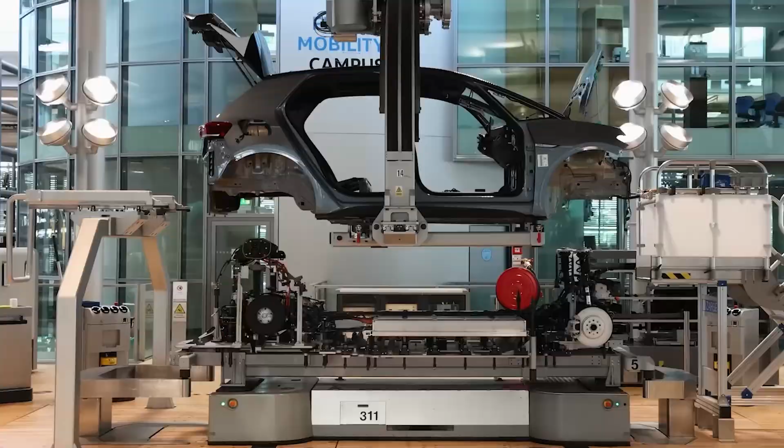You think you know Tesla. You see the brand that made electric cars cool, the company that sparked a revolution, forcing every legacy automaker into a frantic, multi-trillion-dollar pivot. But if you're just looking at the Model Y or the Cybertruck or that rumored $25,000 car, you are missing the real story. You're seeing the shell, but not the ghost.

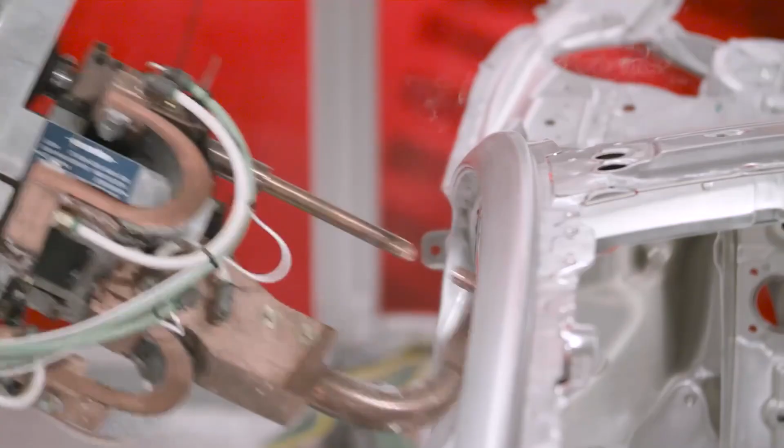Because the car is just the first vessel. Tesla's latest tech isn't one new gadget. It's a deeply integrated five-part ecosystem, a web of innovation. And when these parts combine, the goal isn't just to build a better car. The goal is to fundamentally rewire manufacturing, energy, transportation, and even labor itself.

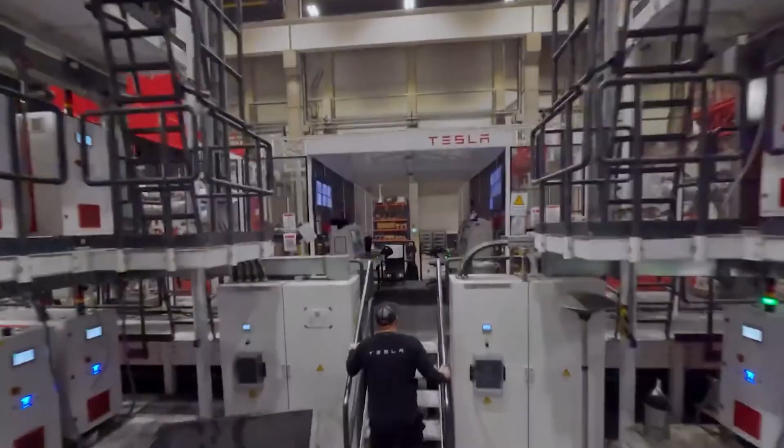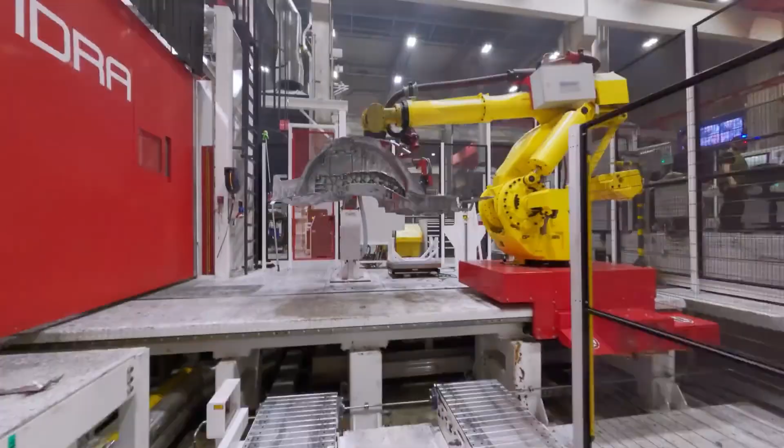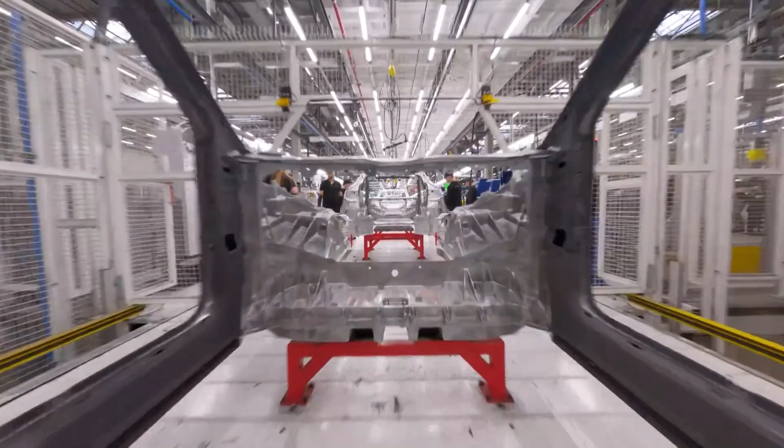This playbook has 5 moves, each one a potential checkmate. First, the unboxed manufacturing process, a total teardown of the 100-year-old assembly line. Second, the 48-volt architecture, a foundational rewrite of the car's nervous system. Third, the 4680 battery cell, the key to unlocking true mass-market range and cost. Fourth, end-to-end AI, the Chat-GPT moment for self-driving that finally unlocks the robotaxi. And fifth, Optimus, the humanoid robot that takes all that AI and puts it on 2 legs.

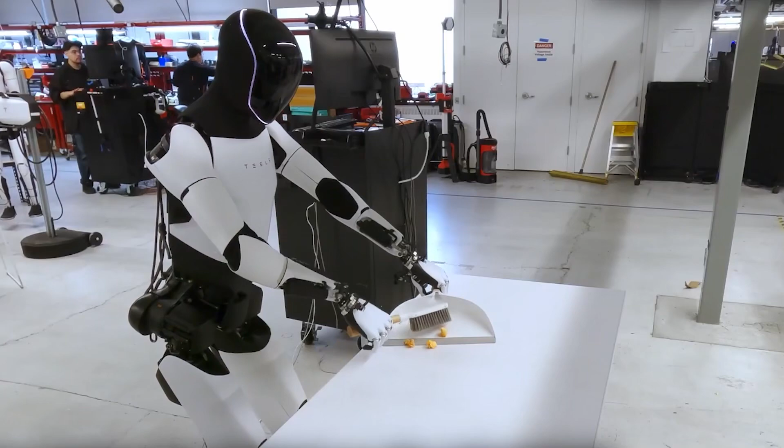Any one of these could change the game, but all 5 together? It's an integrated stack, a fortress that might just give Tesla an insurmountable lead for the next decade.

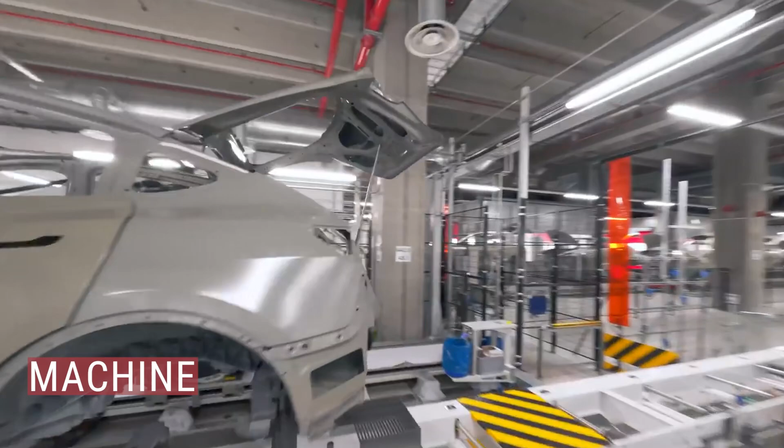This is Dravexa. You need to understand, the most profound innovation at Tesla today isn't a car. It's the factory. You've heard the phrase, straight from Elon Musk, the machine that builds the machine. That is the real product. And with their next-generation platform, that vision is no longer a soundbite. It's here. It's a concept they call the unboxed manufacturing process.

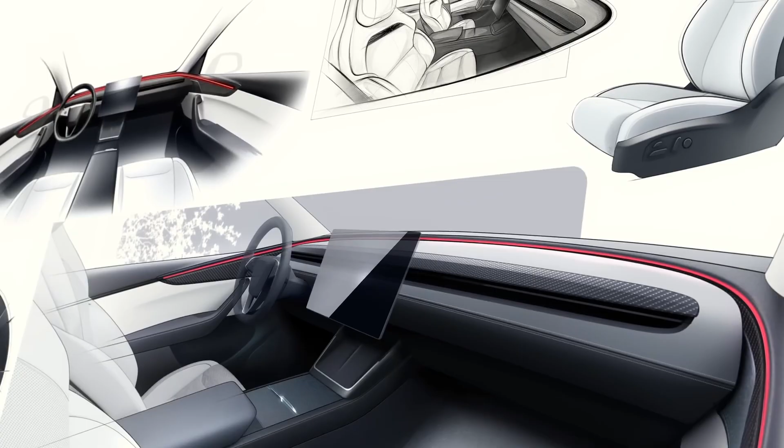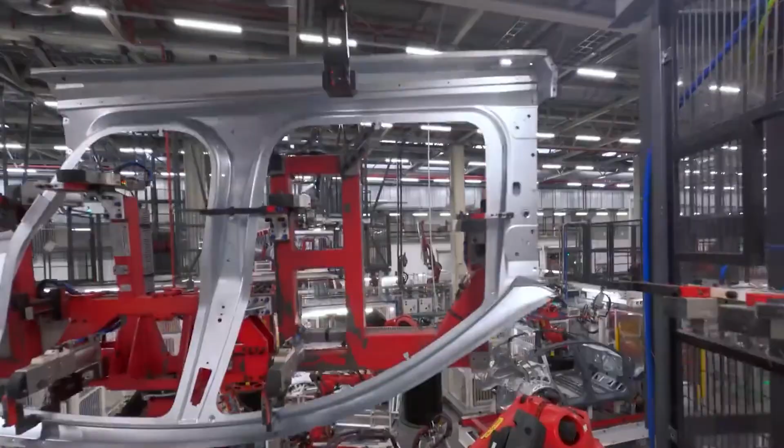For over 100 years, one idea has ruled mass production. Henry Ford's assembly line, you know the picture. A car frame, a body in white, rolling down a single track. Workers and robots swarm it, sequentially adding parts: the suspension, the wiring, the interior, the powertrain, the doors. But that process is fundamentally broken.

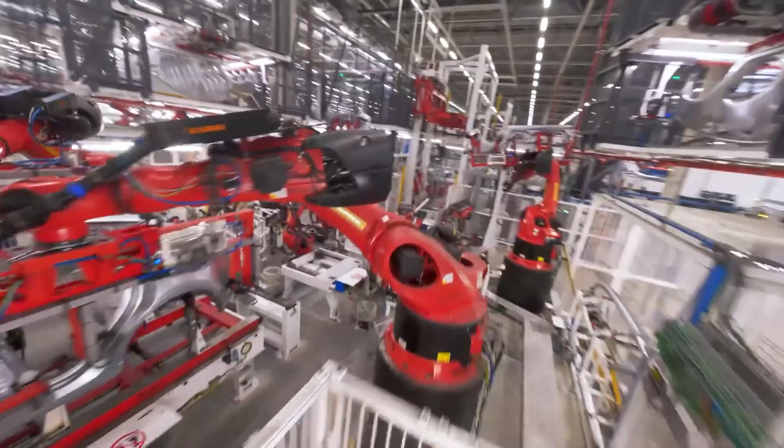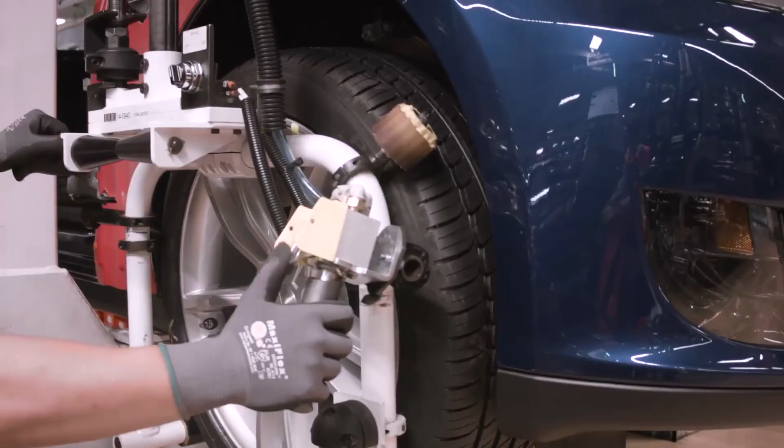Think about it. The entire line can only move as fast as its slowest step, a total bottleneck. Workers and robots are forced into this cramped, complex dance, trying to get inside and under the car. And the line itself, it's inflexible. It's built to do one thing. Retooling it for a new model, it's a nightmare. It's slow.

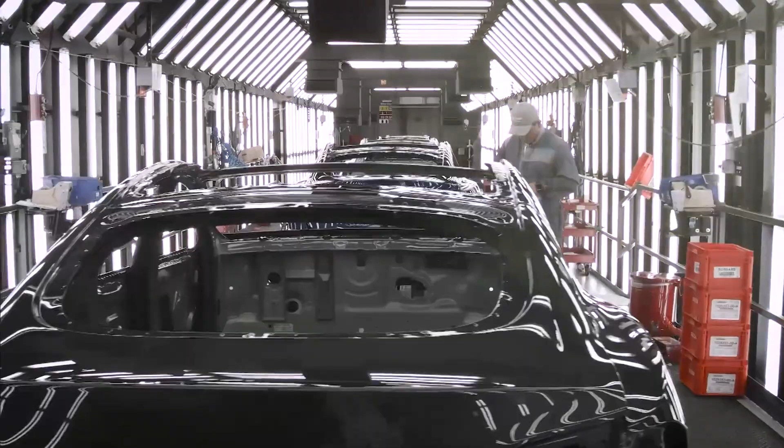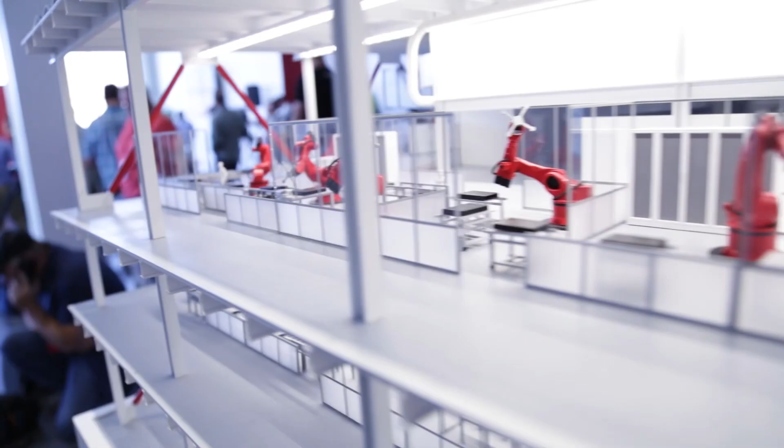It's expensive. So Tesla's unboxed method throws that entire 100-year-old concept in the trash. Instead of one long, slow line, the factory is organized into parallel processed chunks. Think of it like building a Lego car. You'd never build the frame first and then try to stuff the little driver through the tiny window. It's absurd. You'd build the floor, the front block, the rear block, the cabin. And then, at the very end, you just click them all together.

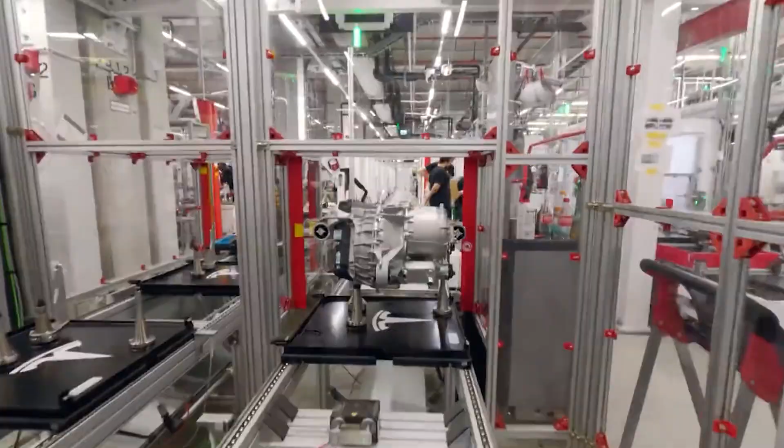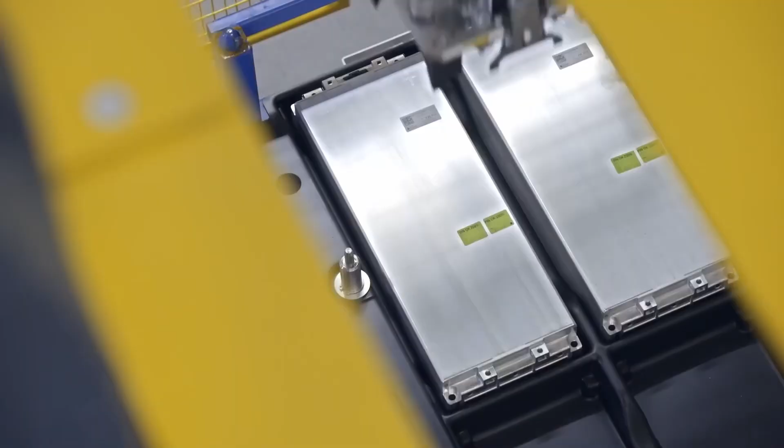This is exactly what the unboxed process does. Imagine this: over in one corner of the factory, that massive front Gigacasting is getting its motor, its suspension, its steering. At the exact same time, in another corner, the rear Gigacasting is getting its motor. And simultaneously, the central floor pan, which is the 4680 structural battery pack, is being prepped.

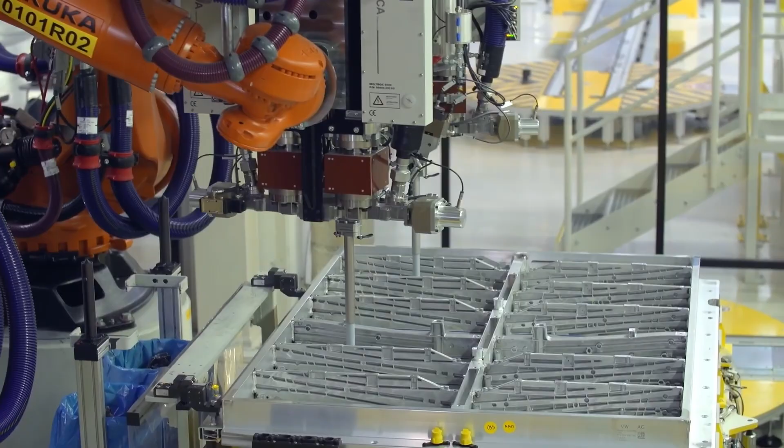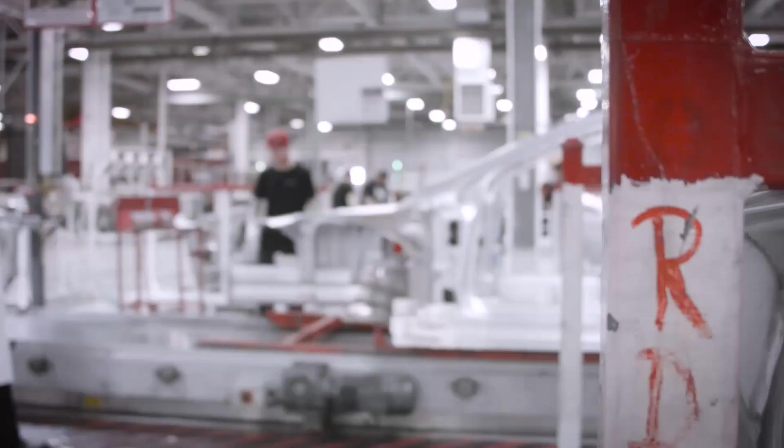The real magic? Open access. Workers and robots have a full 360-degree attack. You want to install a dashboard? It's simple. There's no roof, there are no doors in the way. It is massively faster, it's more ergonomic.

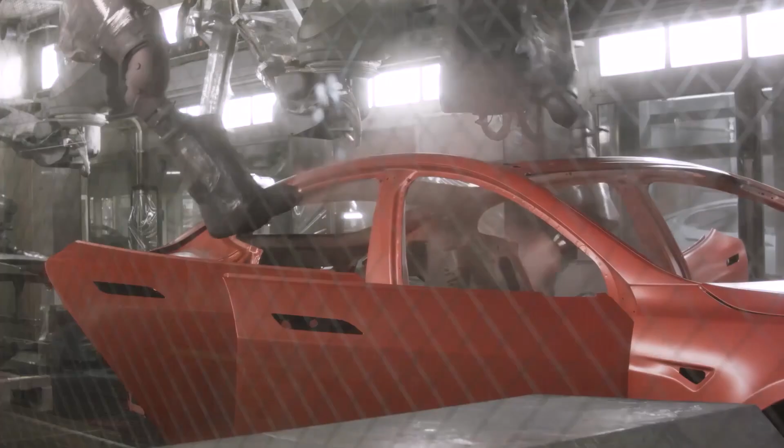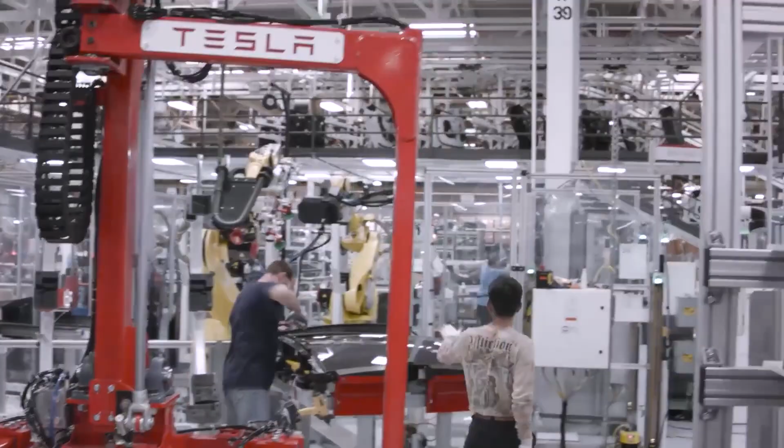Then, and only then, do these huge pre-assembled, pre-tested modules meet the front, the rear, the painted side sections. They're all joined to that structural pack in one final step. The results? Tesla claims a staggering 40% reduction in factory footprint, a 25 to 30% increase in production speed, all while slashing the cost to build the factory in the first place. This isn't just an improvement, it's a new paradigm.

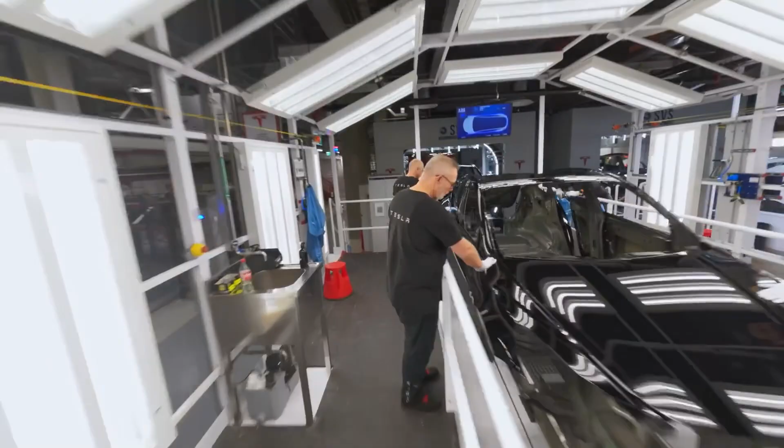This is the only way Tesla can realistically build that $25,000 car at high volume and, most importantly, at high margin. But here's the secret: that unboxed method, that whole Lego block strategy, is only possible because of another Tesla innovation, Gigacasting.

You have to understand, traditionally, a car's underbody is a complex puzzle. We're talking 70, 100, even more different stamped metal pieces. All of them have to be painstakingly welded together by a massive body shop of hundreds and hundreds of robots.

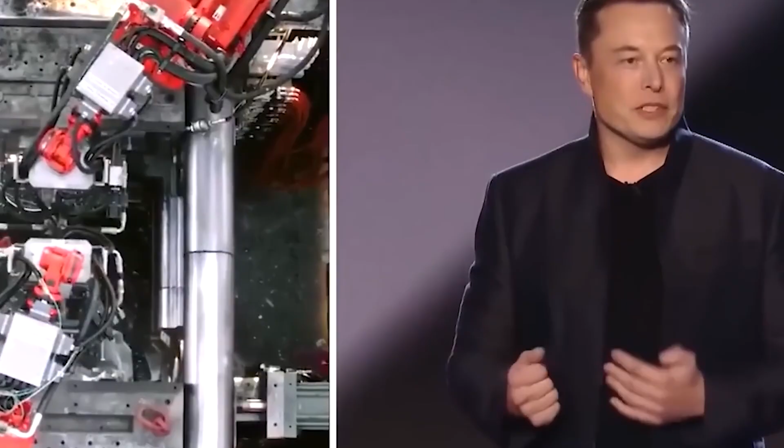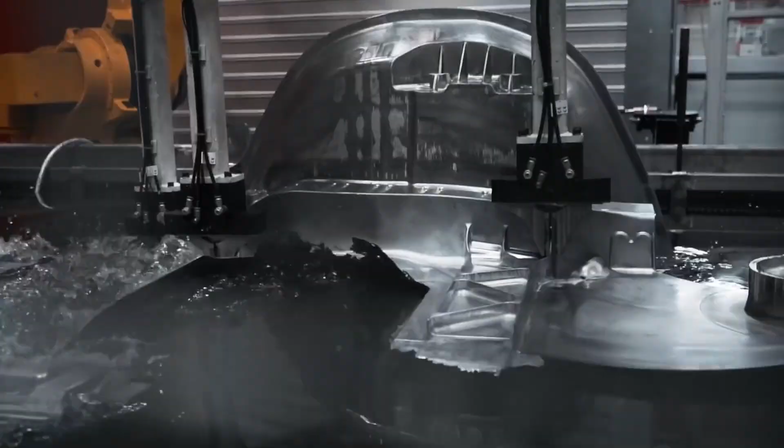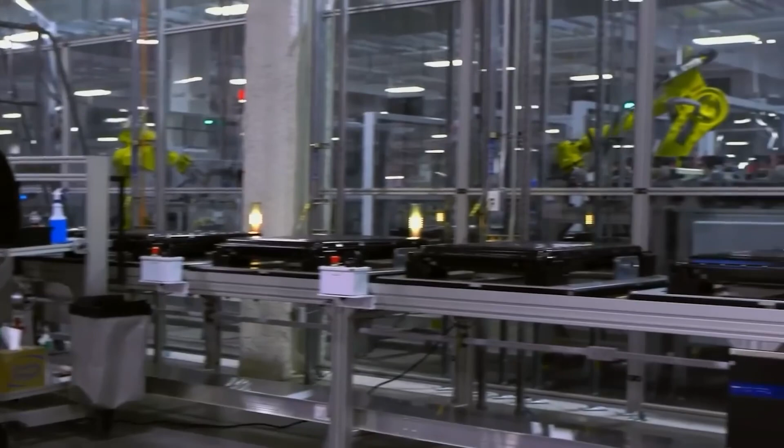Tesla's Gigapress, a machine the size of a small building, throws all that out. It casts the entire front or rear underbody as a single piece of aluminum. Just that one innovation eliminates over 300 robots. It erases 600+ welds. It frees up a massive amount of factory space. The resulting part is stronger, lighter, and critically, unbelievably faster and cheaper to make.

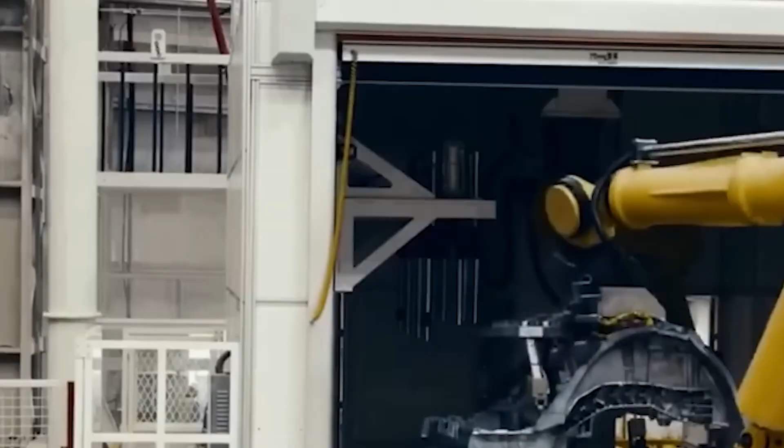That single gigapart, that is the Lego block that the unboxed method is built on. And this is the part that should make you hit that like button.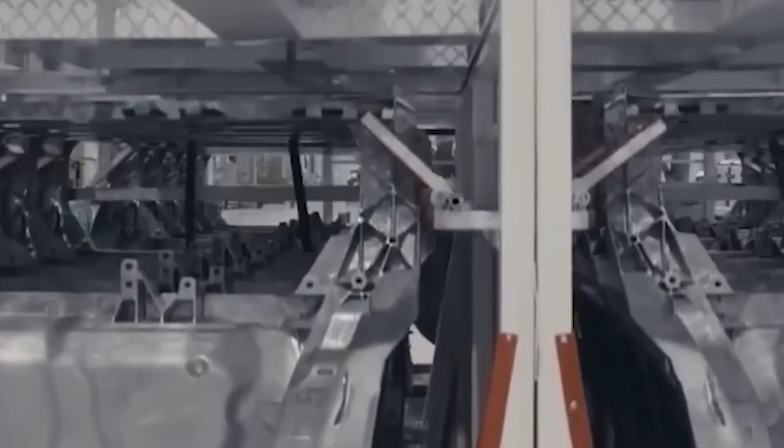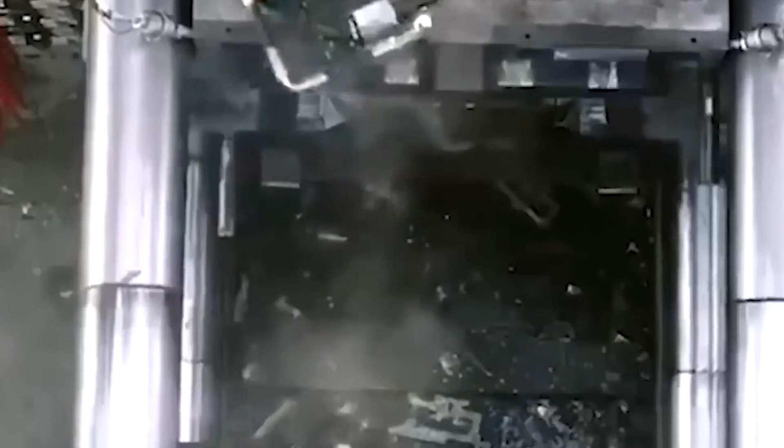While competitors are just now scrambling to order their first gigapresses, they're already years behind, because Tesla isn't just ahead in the machine, it has a multi-year lead in the metallurgy, the secret sauce, that special aluminum alloy that is strong, not brittle, and perfectly castable at high speed. That is a deep, costly moat. And for legacy automakers with their billion-dollar investments in those old-world body shops, crossing it might be impossible.

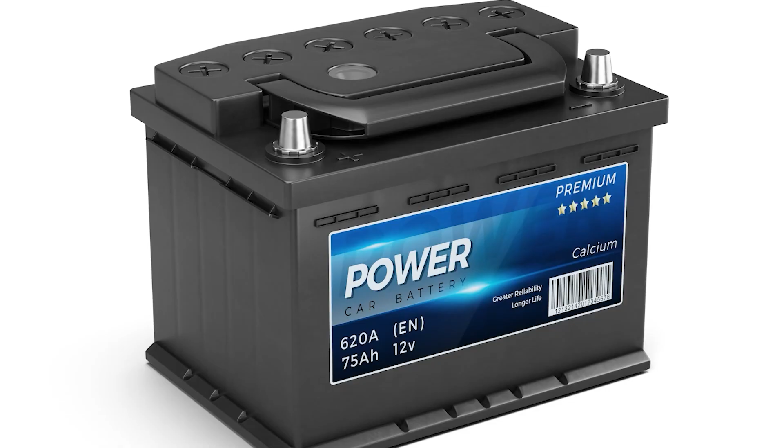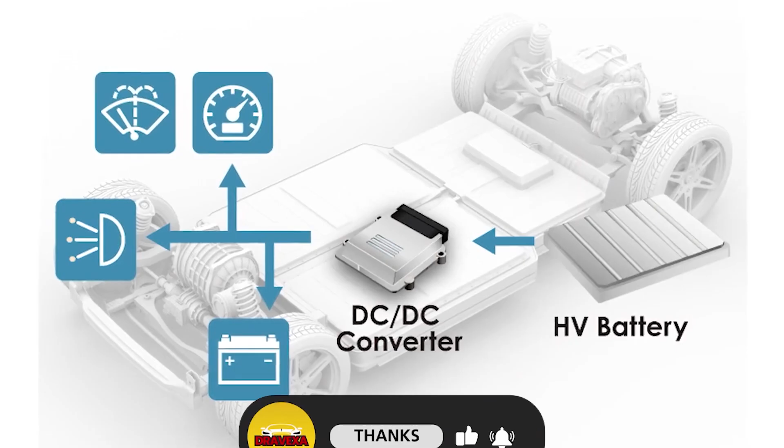So, you have the unboxed skeleton. Now, you need a nervous system. For over 60 years, the entire auto industry has been locked into a dying standard, a 12-volt system. This standard was designed for simple machines, a car with lights, a radio, and maybe power windows. But today, your car is a supercomputer on wheels, and that 12-volt system has become a critical bottleneck.

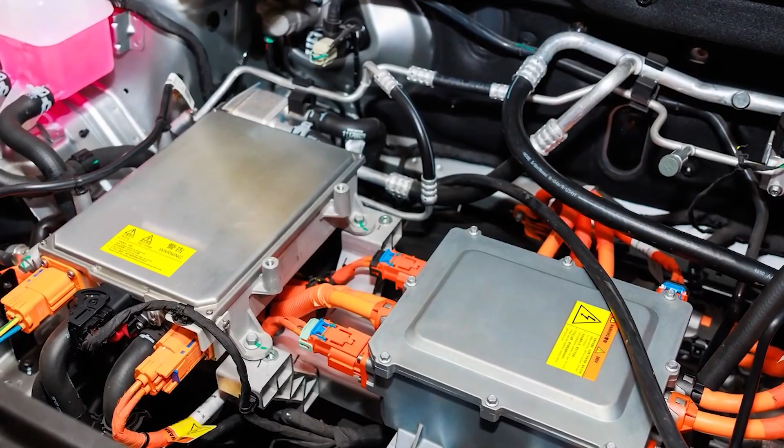The problem is just basic physics. You've heard the equation, power equals voltage times current. If you want more power, say for faster moving seats, a more powerful audio system, or the advanced steer-by-wire you see in the Cybertruck, you have to raise either the voltage or the current. And since the industry has been stuck at 12 volts, their only option was to drastically increase the current. The result? Thick, heavy, expensive copper wires to manage the heat and the load.

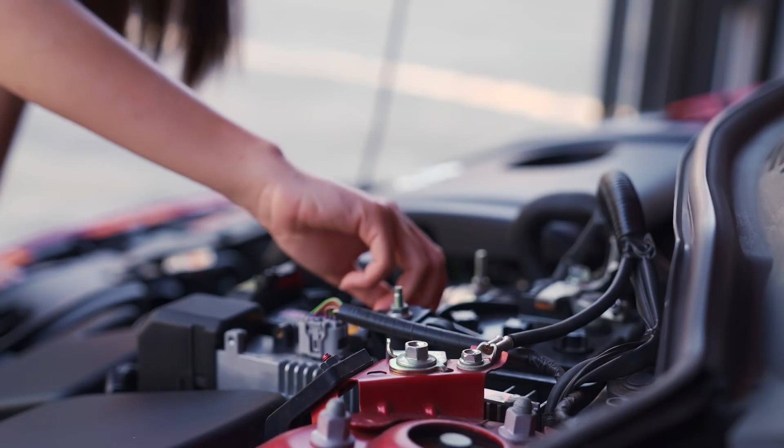We're talking about a wiring harness in a modern luxury car that can weigh over 50 kilograms. That's over 110 pounds. It's miles of copper. It's one of the most complex, costly, and manually installed parts in the entire vehicle. Worse, you hit a hard limit. You simply cannot run the high-power systems of the future on a 12-volt rail. Not efficiently, not safely. So, what does Tesla do?

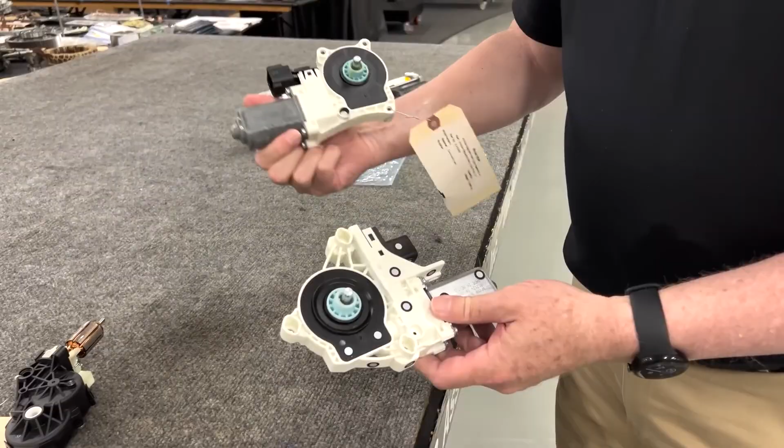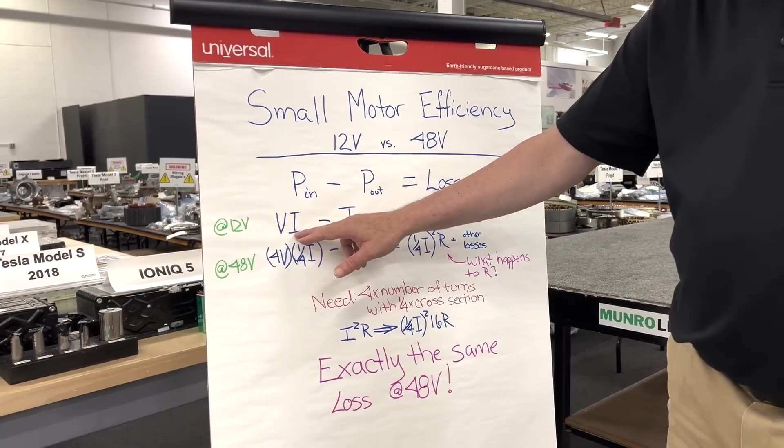They change the equation by moving to a 48-volt system, first in the Cybertruck and now standard on their next-gen platform. They flip the table. Think about it. To get the exact same amount of power, if you multiply the voltage by 4, you can divide the current by 4. That is a profound change.

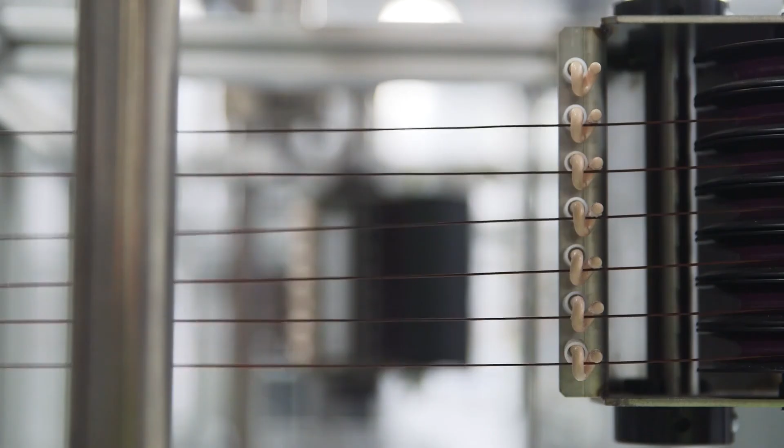A 4 times reduction in current means you can use wires that are dramatically thinner, dramatically lighter, and dramatically cheaper. And the power you lose as heat? That drops by a factor of 16. The Cybertruck's wiring harness is a fraction of the size of a normal truck's.

This saves money, this reduces weight, which increases range, and it massively simplifies that unboxed manufacturing process we just talked about. It's the key that unlocks the Ethernet data bus, where a single cable can finally carry both power and data, destroying the one-wire-per-function nightmare of the past.

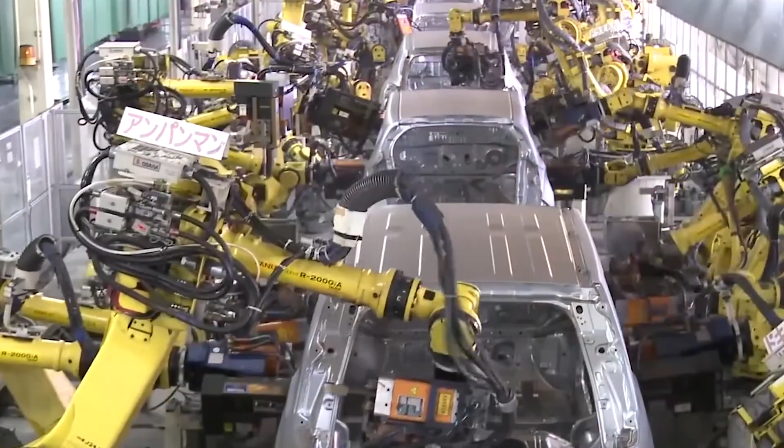This shift to 48 volts, it's not just an internal change, it is a shockwave to the entire global supply chain. For decades, companies like Bosch, Continental, and Denso have perfected the 12-volt world. All those window motors, the pumps, the fans, they are all 12-volt. By moving to 48 volts, Tesla is effectively making its entire parts list obsolete.

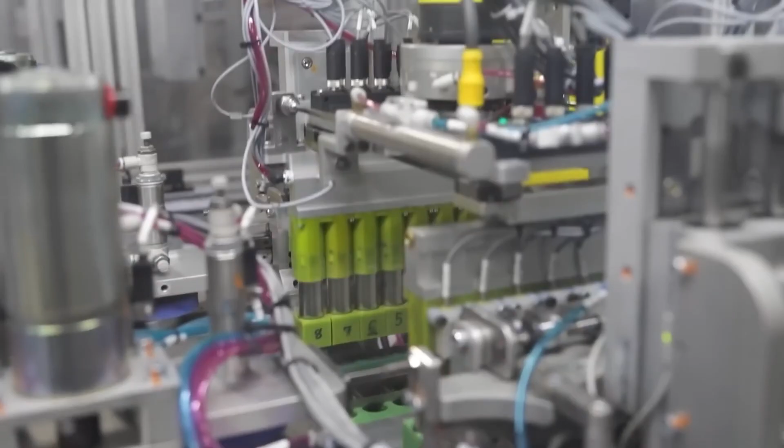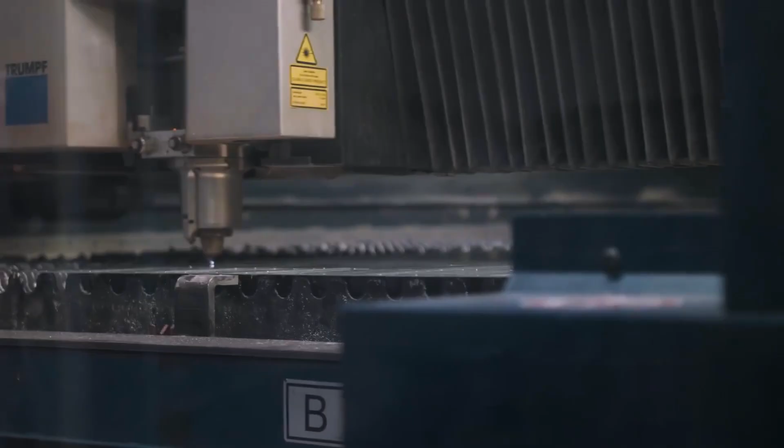Suppliers now have to re-engineer, retool, and revalidate everything. A company like Ford or GM, they can't just switch. They are being held hostage by a supply chain that simply isn't ready. But Tesla? Because they designed so many of their own controllers, their own components, they can force the change. Their vertical integration lets them absorb the complexity. While their competitors are left tethered to a 60-year-old standard, adding yet another layer to Tesla's massive manufacturing and cost advantage.

So, your factory is fast, your car's nervous system is efficient, but you still have a massive problem. Energy. The car still needs a breakthrough to be affordable for everyone. And that breakthrough is the 4680 battery cell.

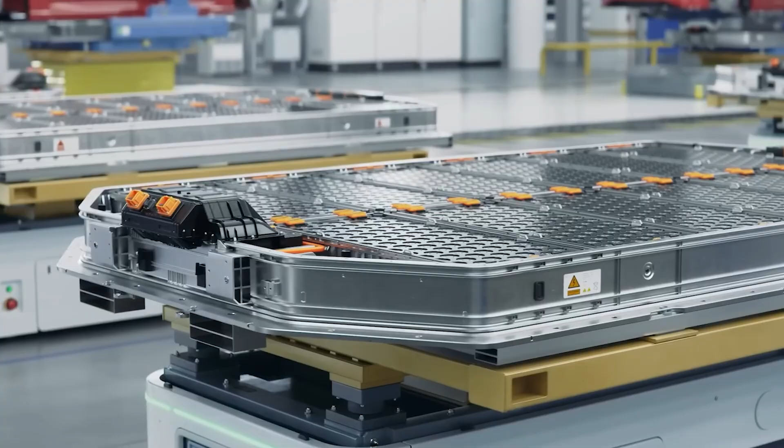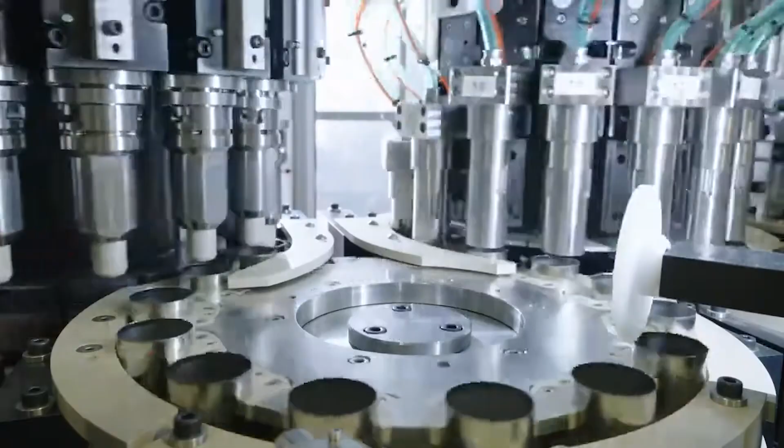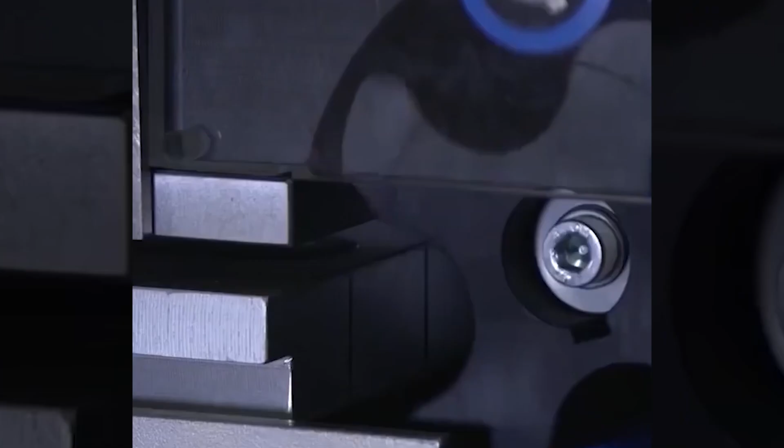The name? It's just the dimensions. 46 millimeters wide, 80 millimeters tall. But its design? That is the revolution. You see, a traditional battery, like the 2170 cells in a Model 3, has two little tiny tabs at the ends. All the energy has to fight its way in and out through these two tiny bottlenecks. This creates a traffic jam. It creates massive heat, especially when you're charging fast or flooring it.

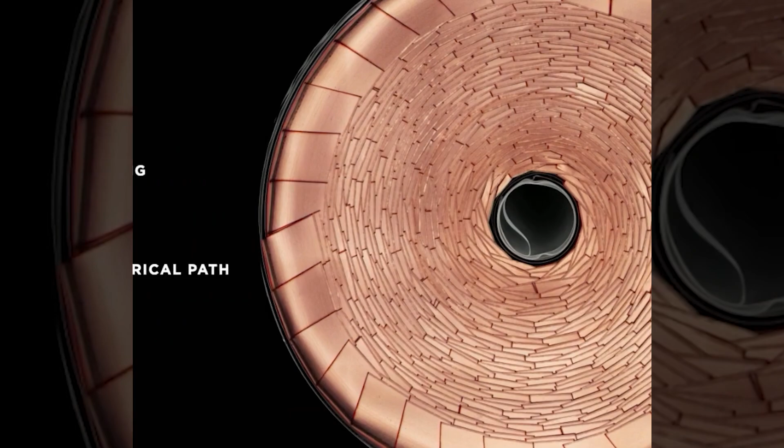The 4680's tabless design is pure genius. Instead of a tiny tab, it uses a shingled spiral. This means the entire edge of the battery's internal foil is the connection.

The path for the energy is suddenly short, wide, and clear. This one change fundamentally rewrites the cell's properties.

First, less heat, drastically less. Second, faster charging. With no heat to manage, you can flood the cell with power. And third, more power instantly. This is the secret to plaid-level acceleration. But that isn't even the real story.

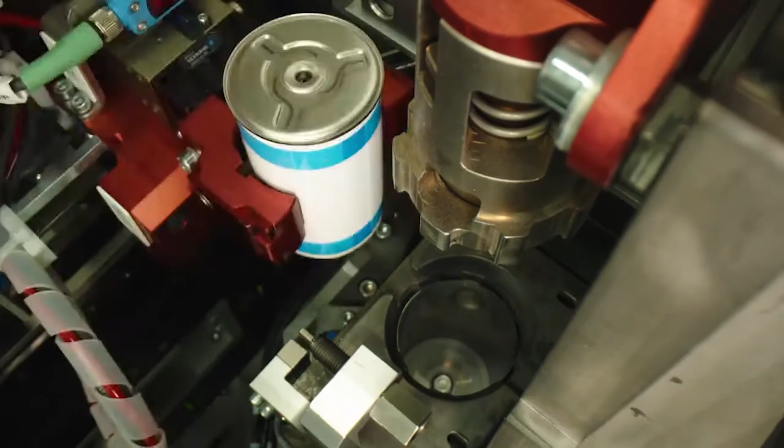It's a process called dry battery electrode, or DBE. For 50 years, everyone has made batteries the same way, a wet slurry. You mix the battery materials into a toxic wet paste, you paint it onto a foil, and then you run it through massive 100-meter-long energy-blasting ovens to dry it out.

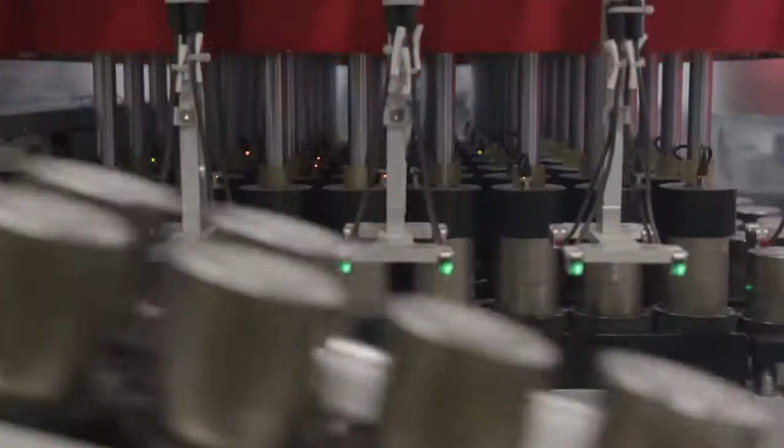Tesla's DBE process stamps the active material dry directly onto the foil. No solvent, no water, no drying. Now, you need to understand how impossibly difficult this is. It is the holy grail of battery manufacturing. It's the main reason the 4680 ramp-up was so slow.

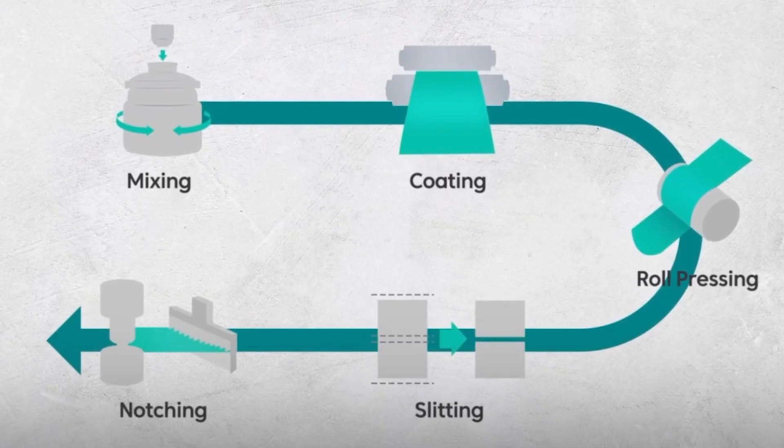The old wet method is like painting a wall. It's slow, but the paint spreads evenly. The dry method is like trying to spread a layer of fine dust perfectly evenly on a wall, make it stick, and do it at lightning speed. It's like trying to compress fine gravel into a perfect mirror.

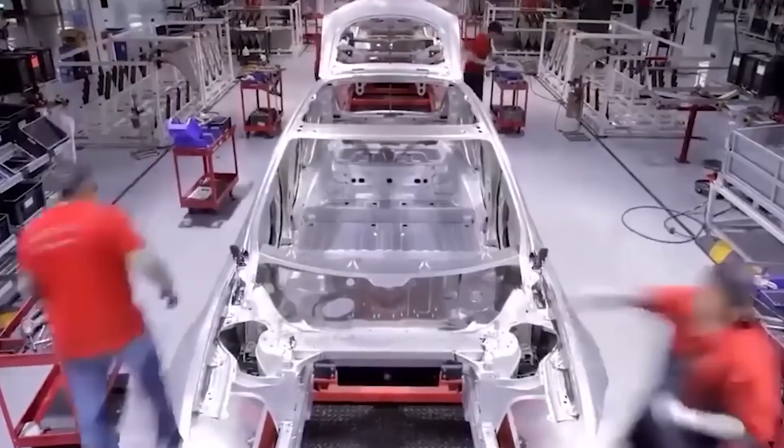And as of 2025, Tesla is finally scaling it. This process doesn't just promise to cut factory footprint and energy use by 10 times. Internal reports are already clear.

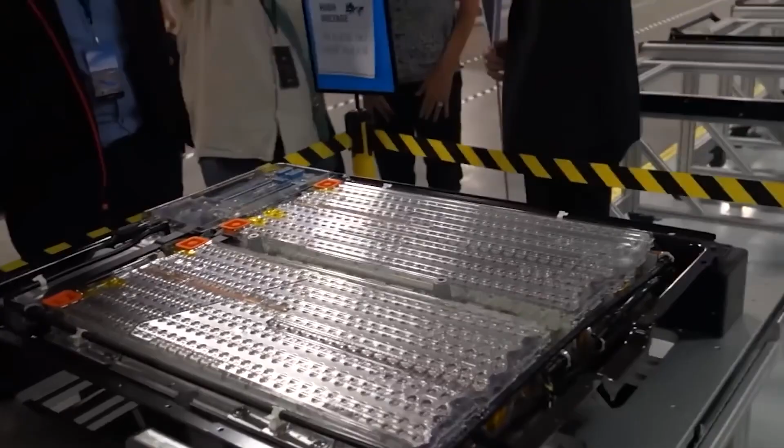The 4680 cell is already cheaper for Tesla to make than anything they can buy from suppliers. This is the final piece of the puzzle. You combine this cheap, powerful cell with a structural pack where the battery is the floor of the car, saving 370 parts, and you have the key. This is the only way the $25,000 car is possible. It's the only way the Tesla Semi works.

So, the 4680 cell is the heart, but now we talk about the brain. Full self-driving. For years, FSD has been this promising, controversial, coming soon beta. But with version 12, it went through a change as fundamental as the jump from a flip phone to a smartphone. You see, the old way, FSD 11 and everything before it, was a mountain of code. It was a complex, human-written stack. Hundreds of thousands of lines of C++, a giant, fragile rule book.

If the camera sees a red light, then apply the brake. If a car is merging, then calculate its trajectory. If it's a stop sign, but there's a pedestrian and the cross-traffic is clear. This approach is brittle. It's impossible for a human to write a rule for every edge case the real world can throw at you. A stop sign hidden by a tree. A construction worker waving you through a red light. This is why true self-driving has been almost solved for a decade.

So with FSD V12, Tesla did the unthinkable. They deleted it. They deleted over 300,000 lines of that C++ code, and they replaced it with a single end-to-end neural network. This new system was not programmed, it was trained. Tesla fed it millions of video clips of its best human drivers and essentially told the AI, 'Watch this. Learn to drive like this.' And it did. Now the system takes in raw video from the cameras and outputs steering, acceleration, and braking commands.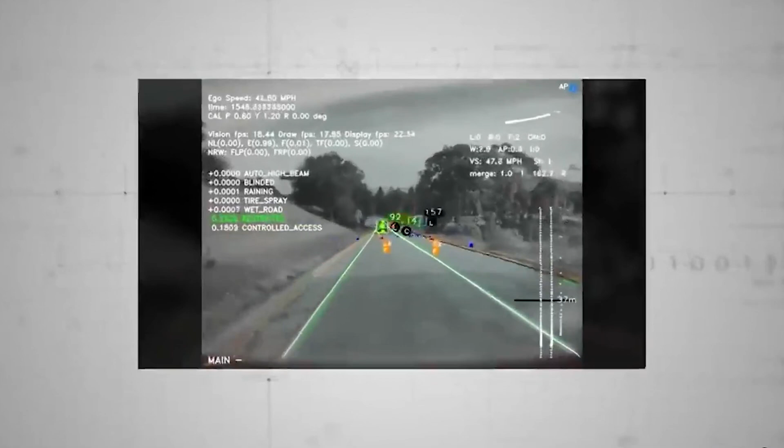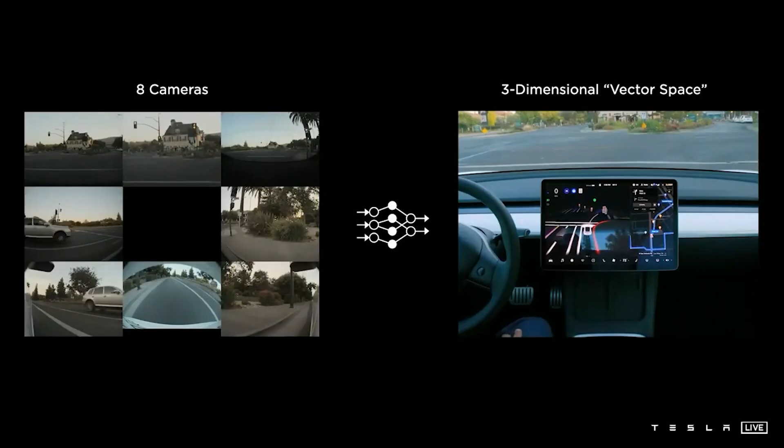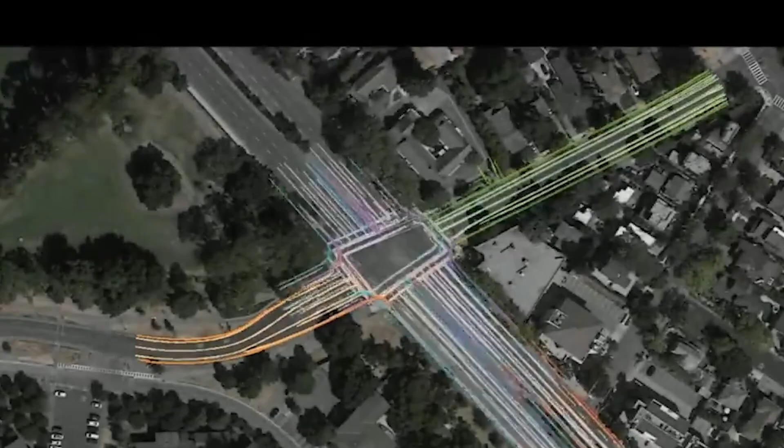Photons in, controls out. This is the ChatGPT moment for physical AI. The AI is predicting the next most likely driving action based on all the video it has ever seen. It learned how to creep at an unprotected left turn by observing humans do it, not by reading a rule. And this system is infinitely scalable. To make it smarter, you don't hire 1,000 engineers to write more if-then rules. You just curate new, tricky video scenarios, add them to the training set, and recompile the brain.

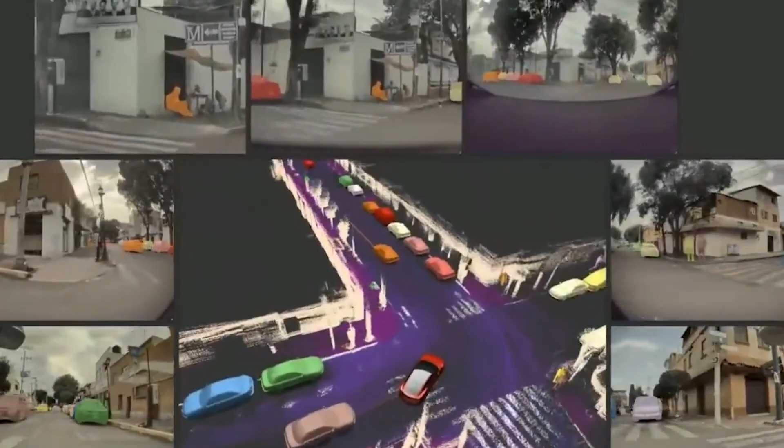But an AI is only as good as the data it's fed and the computer that feeds it. First, the data. With over 6 million FSD-capable cars on the road, Tesla has the largest data-gathering operation in history. When a driver takes over, the system flags that video clip, that difficult, snowy left turn, and uploads it to the data factory. Second, the computer.

So, they're pivoting. They are now focused on a unified AI architecture. New chips called AI5 and AI6 that will do both. They are building their new training supercomputer, what you could call Dojo 3, out of the same powerful chips that will be in their future cars.

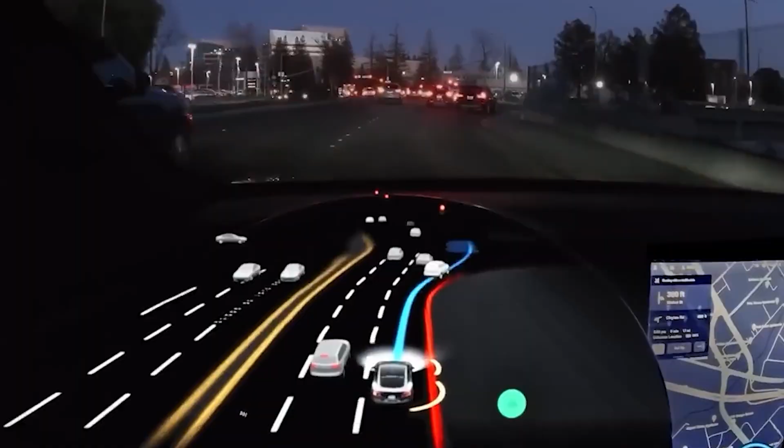This creates the ultimate flywheel, a doom loop for competitors. Better AI leads to a better FSD. More people use it, more data is collected, the AI gets better, faster, and their new unified computer spins this flywheel at a speed and a cost no one else can match. This is the only path that plausibly solves full autonomy, and when it does, it unlocks the single most disruptive economic force of all, the robotaxi. A $25,000 car that can drive itself 24/7 and earn $30,000 a year.

That isn't a car anymore. It's an asset, and it's one that will change our cities and our world forever.

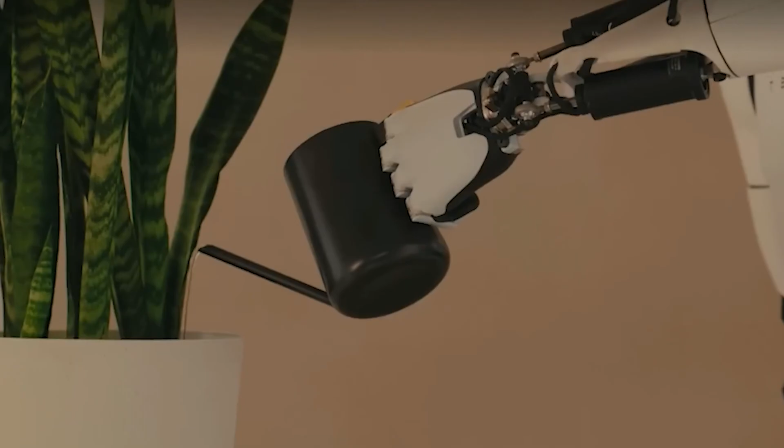Think about it. The brain. Optimus runs the exact same end-to-end FSD neural net as the cars. The AI that learned to navigate a chaotic city street can learn to navigate a factory floor. It just needs to be trained on human physics, walking, balancing, grasping, instead of car physics.

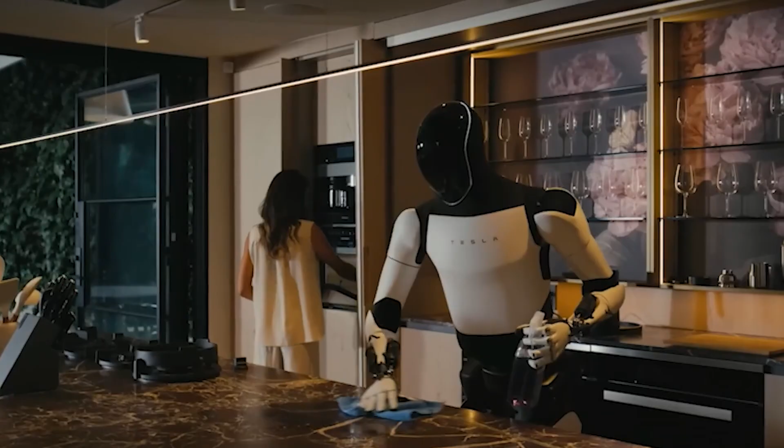The power? It is powered by Tesla's own 4680-era batteries. Its motors, its actuators, its power electronics, all are optimized for cost and efficiency straight from the car division. And how will they build millions of them? With the exact same unboxed, gigacasted mass production principles we just saw.

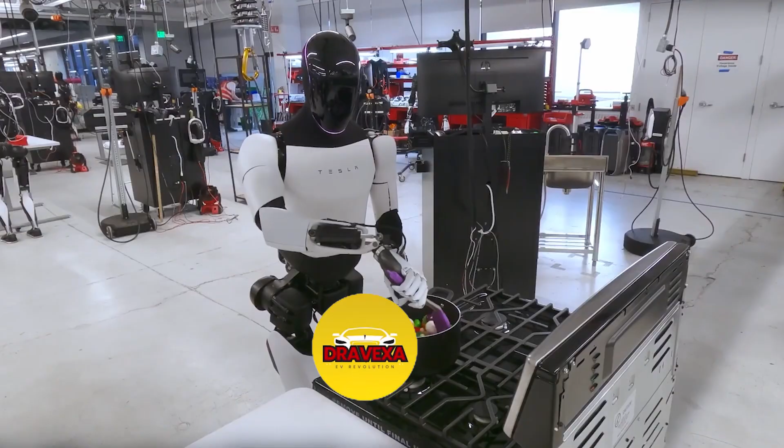The progress has been staggering. Gen 1 could barely walk. As of late 2025, the new Optimus Gen 2.5, with its 10-kilogram weight reduction and fully Tesla-designed actuators, now has hands with tactile sensing. Hands so delicate they can handle an egg.

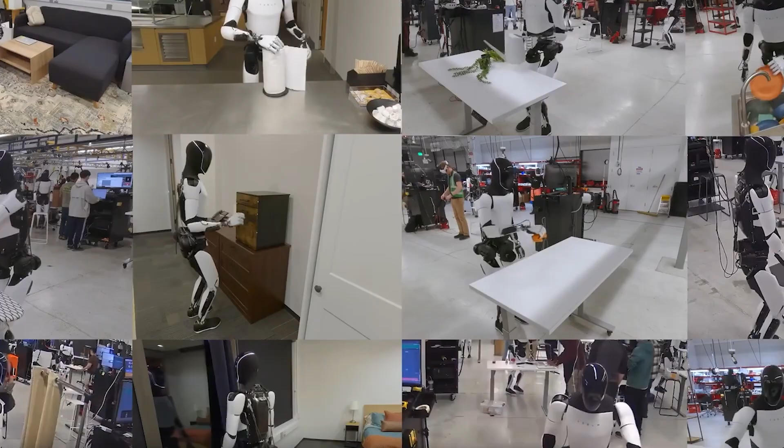And this isn't a lab experiment. Tesla is already testing Optimus bots in its own factories right now, teaching them to perform the unsafe, repetitive, or boring tasks. That's the first step. The goal is a general-purpose robot deployed by the millions.

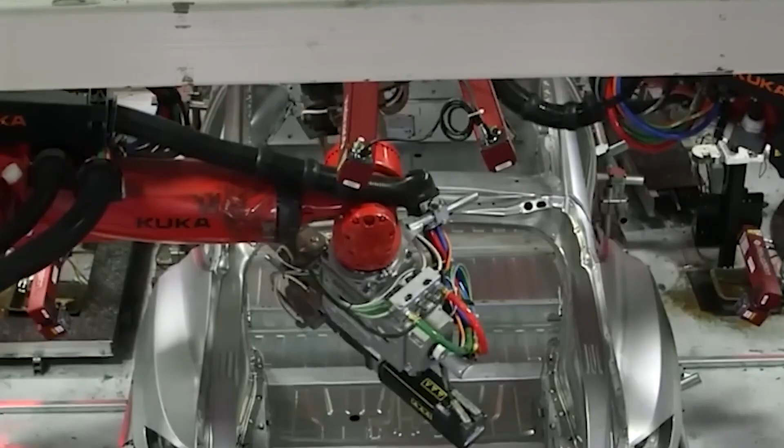But you might be asking, why a complex humanoid? Why not just a simple wheeled robot for the factory? That question and its answer reveals the true scale of Tesla's ambition.

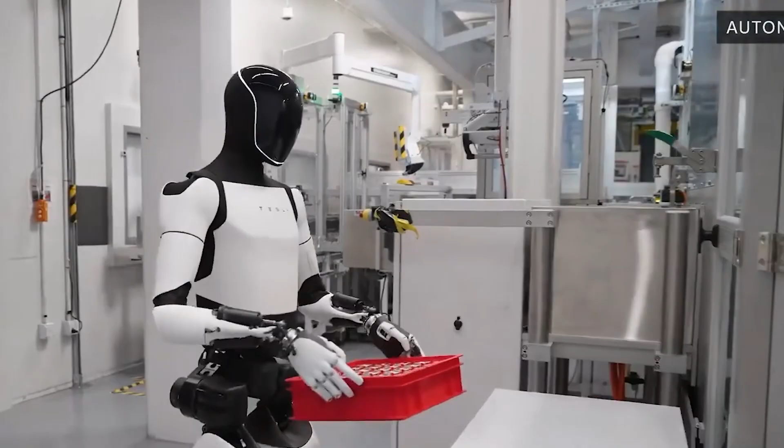The answer is simple. The world is already built for us. Our factories, our homes, our offices, our hospitals, they all have stairs, doors, shelves, and tools, all designed for a creature with 2 legs, 2 arms, and 5-fingered hands. A specialized wheeled robot can only do one thing in one place, but a general-purpose humanoid like Optimus can, in theory, do anything a human can do anywhere a human can go.

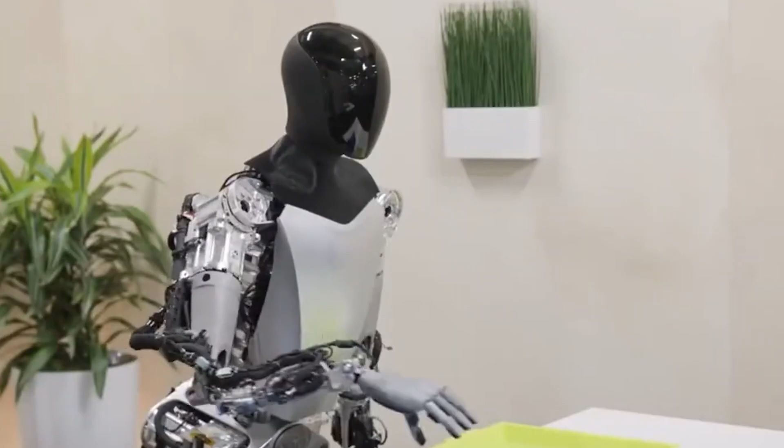It can learn to install a car door, then be retrained overnight to stack boxes, and then go home with an owner to wash the dishes. It doesn't require us to redesign the entire world for it. It's designed to fit into ours. This is the difference between building a single product and building an entirely new, programmable labor force.

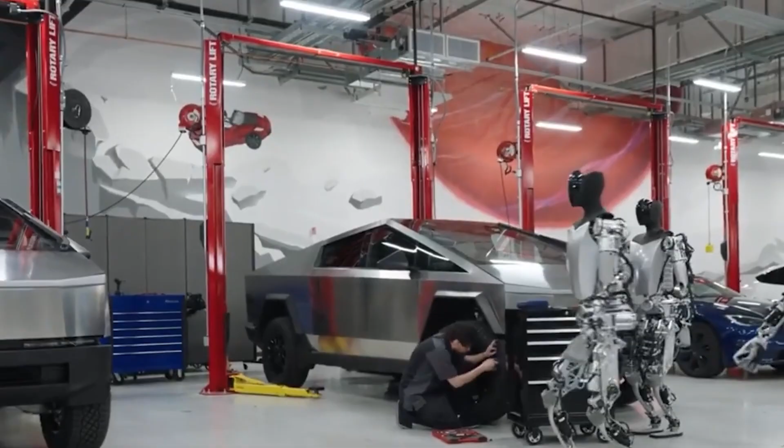The economic implications are almost impossible to comprehend. Musk has stated the demand for Optimus could be 10 to 20 billion units. That's more than 1 for every human on Earth. An autonomous bipedal worker, one that can be hired for a fraction of the cost of human labor, is an economic force larger than the advent of the car, the personal computer, and the internet combined.